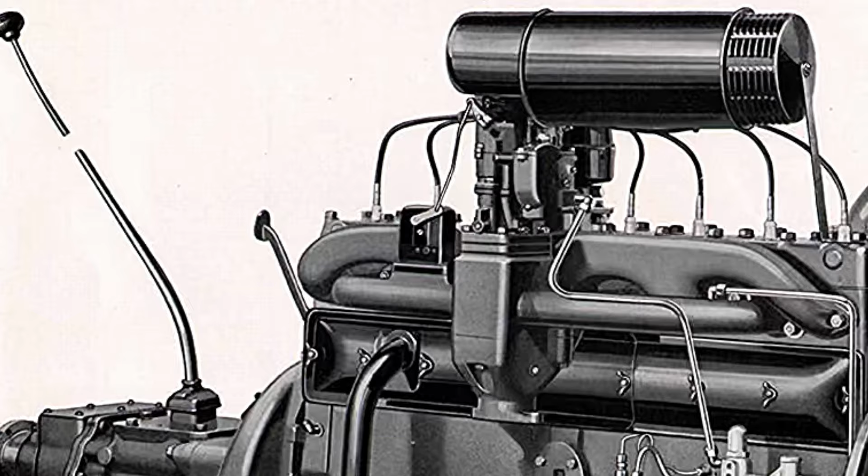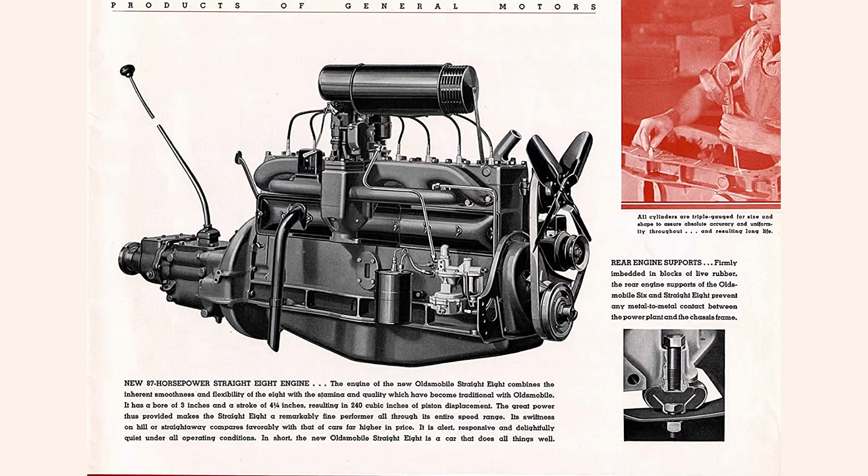The year is 1932. Oldsmobile decides to make an inline 8 because looking around at all of the other companies, everybody that's anybody has an inline 8. It was a different time. Just stop and think about it. Chevy didn't have an inline 8, but they had an overhead valve inline 6. Pontiac had a straight 8. Buick had a straight 8 as well, but they used overhead valves. Cadillac never had a straight 8, but they offered a V8.

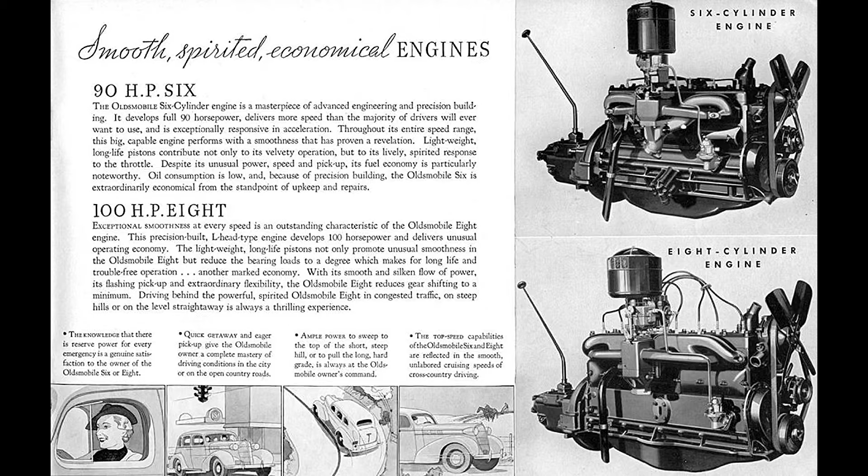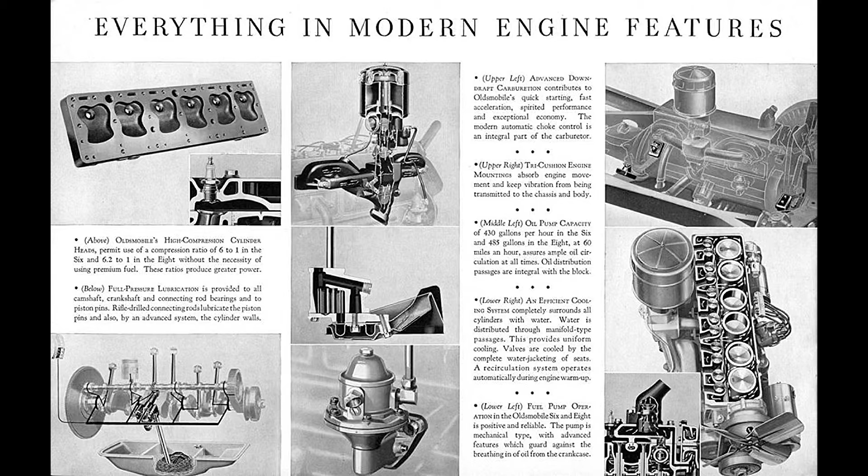Oldsmobile would use the straight 8 as top engine option from 1932 through 1948 in two displacements, 240 and 257. Introduced in 1932, the 240 cubic inch displacement inline 8 used mushroom-type lifters as well as 5 main bearings. The engine was a conventional side valve engine where the valves and pistons are right next to each other.

240 cubic inch displacement inline 8, 3.9 liters. It's good for 87 horsepower in 1932. Power would increase to 90 horsepower in 1933, 100 horsepower in 1935. So it makes up to 100 horsepower at 3,350 RPM, an estimated 160 pound-feet or 217 newton meters around 1800 RPM, with a bore of 3 inches and a stroke of 4.3 inches. Compression is 6.2 to 1. It uses a duplex downdraft carburetor.

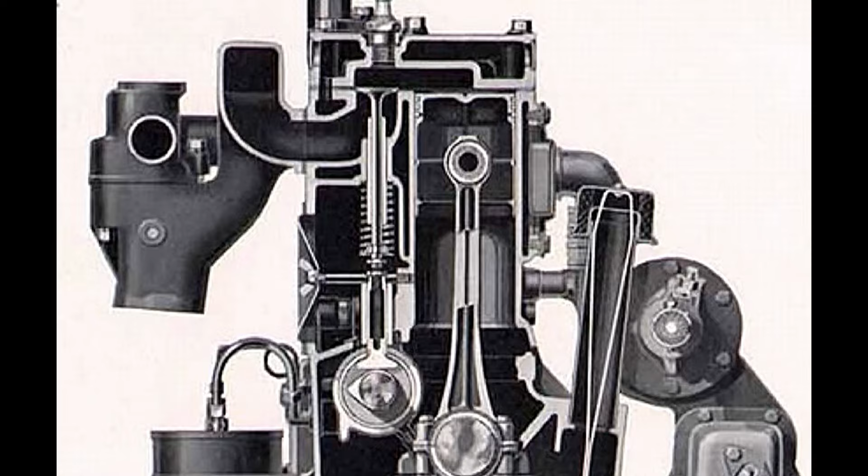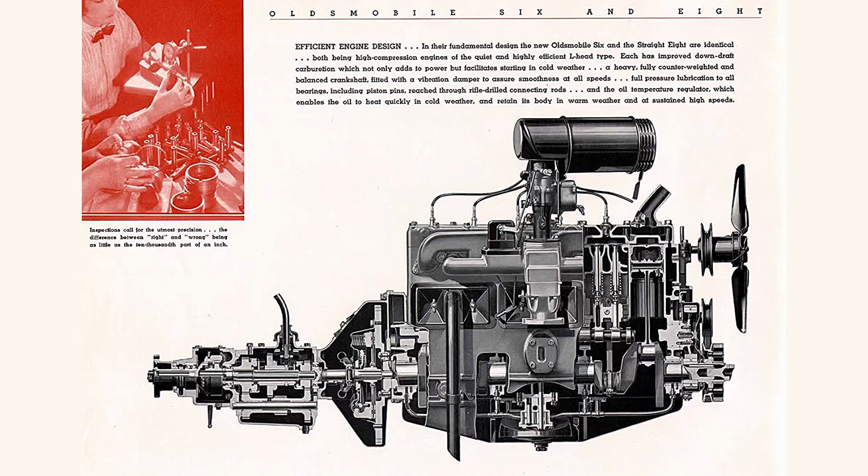In 1933, this engine saw a major improvement with the bearings, going from poured Babbitt bearings to shell bearings. The distributor is mounted to the top of the head. This engine was used between 1932 through 1937. It's also found in the LaSalle from 1934 through 1936, but the LaSalle engine increased displacement to 248 cubic inch displacement. Oldsmobile would discontinue the 240 in 1937 for a bigger version, the 257.

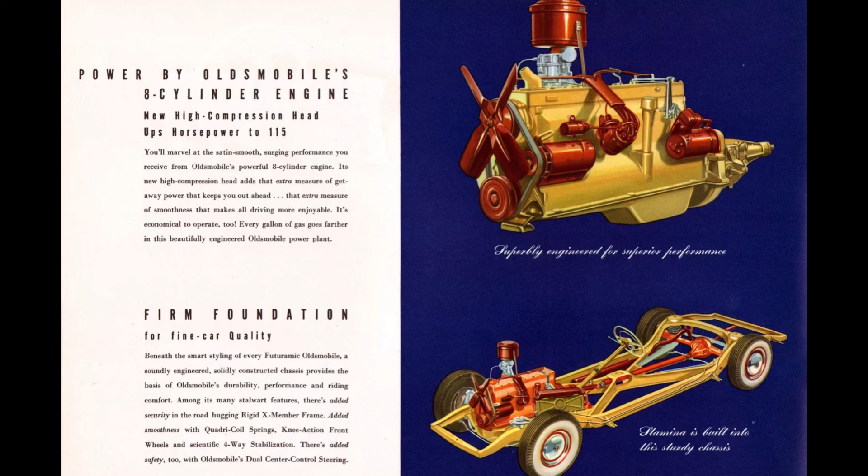Don't get this confused with the 257 Big 6, two totally different engines. The easiest way to tell these two, the 240 inline 8 and the 257 inline 8, apart from one another is the bigger 257's distributor is mounted on the side, whereas the 240's distributor is mounted to the head.

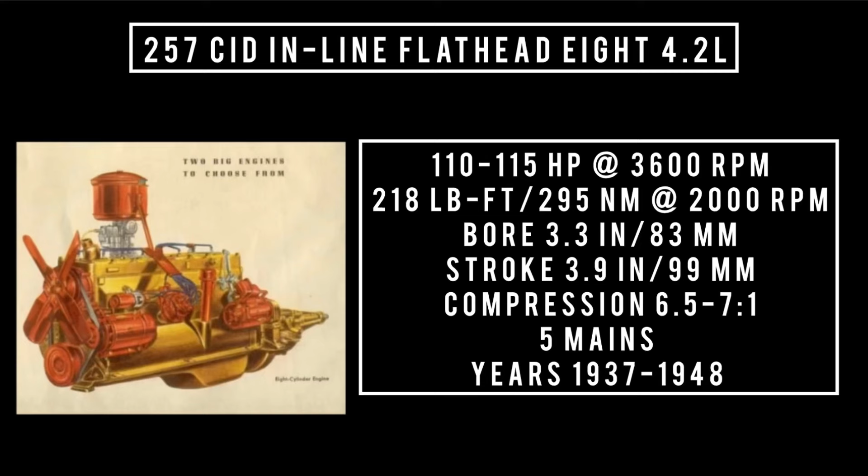257 cubic inch displacement flathead inline 8, 4.2 liters. It's good for 110 to 115 horsepower at 3,600 RPM, up to 218 pound-feet or 295 newton meters at 2,000 RPM, with a bore of 3.3 inches and a stroke of 3.9 inches. Compression is 6.5 or 7 to 1. This engine was used from 1937 through 1948.

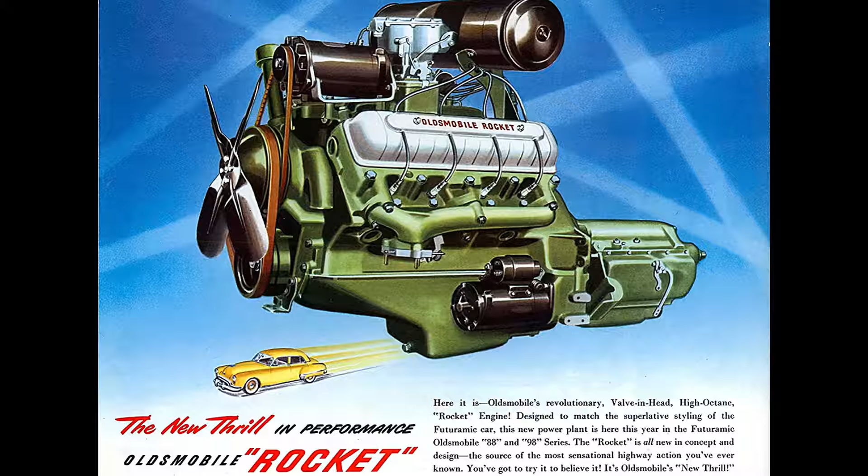In 1949, Oldsmobile would make an all-new overhead valve V8 engine and would release it alongside Cadillac's new V8. But as they say, that's another engine episode for another day.

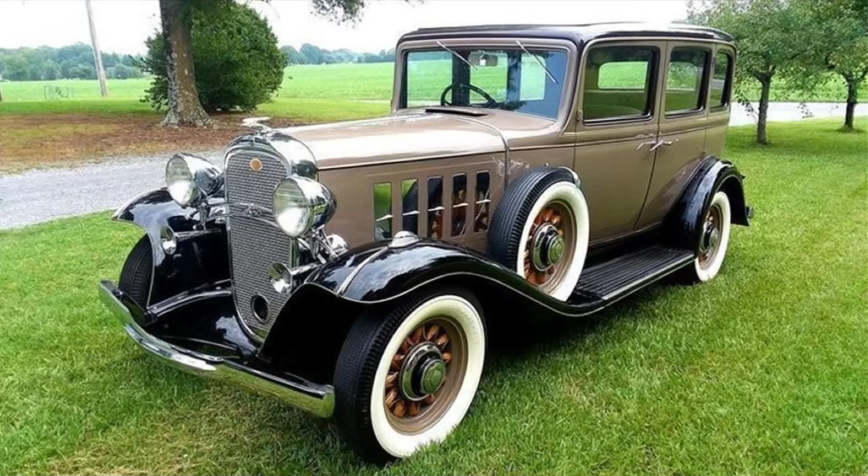All right, now it's time for Would You Rather, 2 scenarios today. In the first scenario, would you rather have a 1932 Oldsmobile L32, a 1940 Oldsmobile Series 90, or a 1948 Oldsmobile Futuramic? I'm going to leave this here for a minute. If you need more time, feel free, pause the video.

On to the second scenario: 1942 Oldsmobile Custom 8 Cruiser, 1935 Oldsmobile L35, or 1937 Oldsmobile 8. Once again, going to leave this here for a minute. If you need more time, and write-ins are also welcome. If you can think of a better car than what is listed, write it in the comment section below.